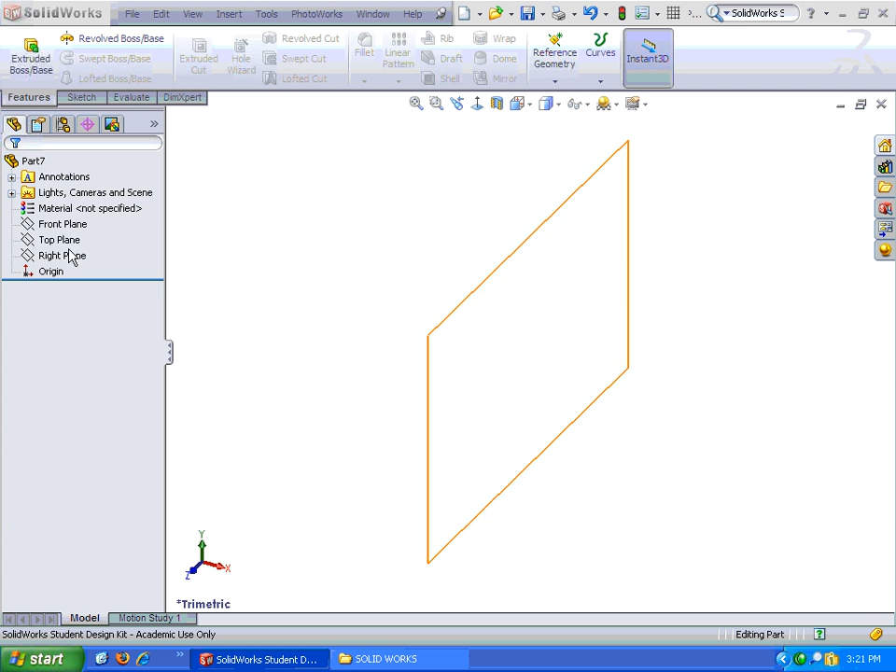Alright, lots of places we could start on this one. Let's go ahead and start on the top plane. So I'm going to click top plane, immediately hit the sketch button. It rotates it. I know my sketch is active because I can see the grid.

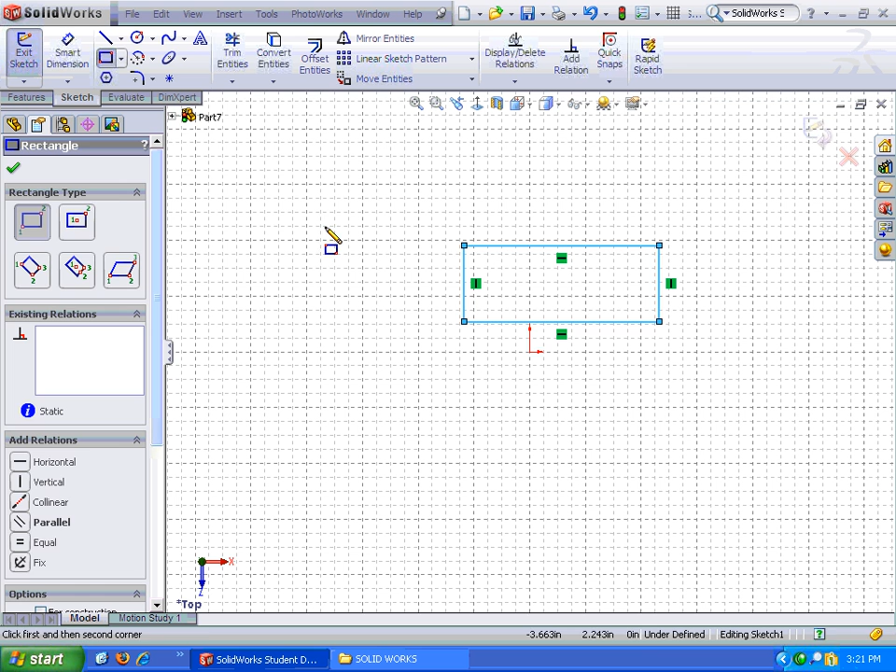So let's go ahead and start sketching. First thing I'm going to do is draw a rectangle, but I'm not going to tie it to the origin yet. Let's go ahead and put some dimensions on this rectangle. The height of that rectangle, or the depth of it, I guess, is 1.5. And the width across here is 3.25.

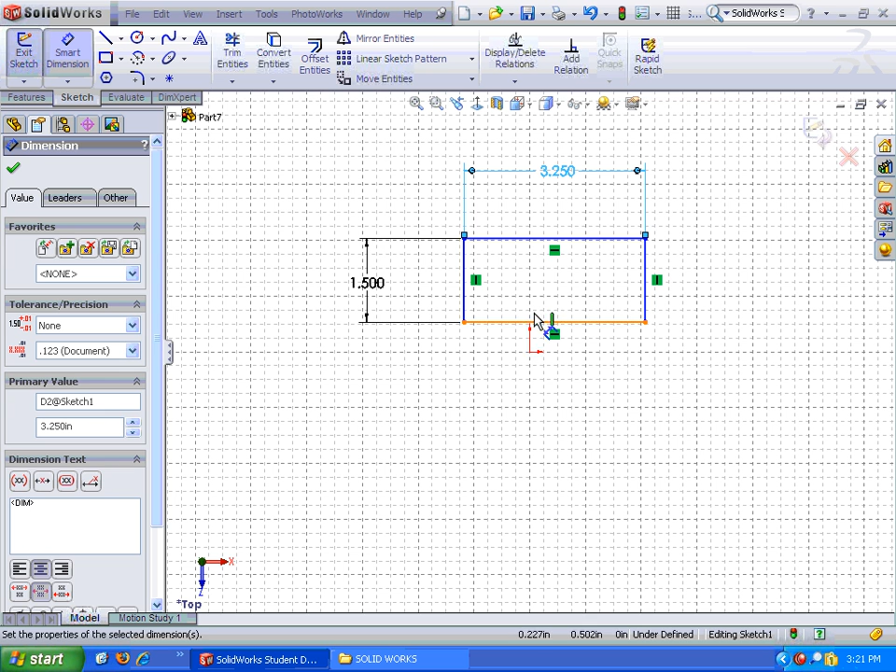Now we're going to tie it to this point. So I'm going to go up and go to Add Relation. I'm going to click on the line and the origin, and I'm going to go midpoint. Now it's tied in. Hit the check mark.

Now we can extrude it. So that's under Features, Extruded Boss Base. And I believe our height here is 0.375. Click the check mark.

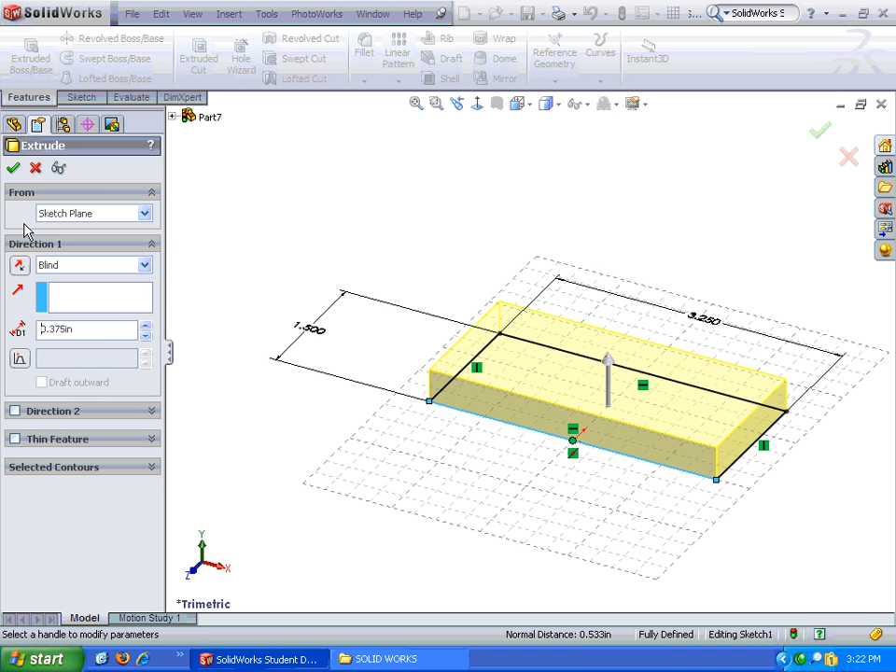Alright, now let's go ahead and sketch in our profile for the actual support portion of it. I'm going to click on this surface, turn it normal to, right click and put a sketch on it. And let's move that up just a hair.

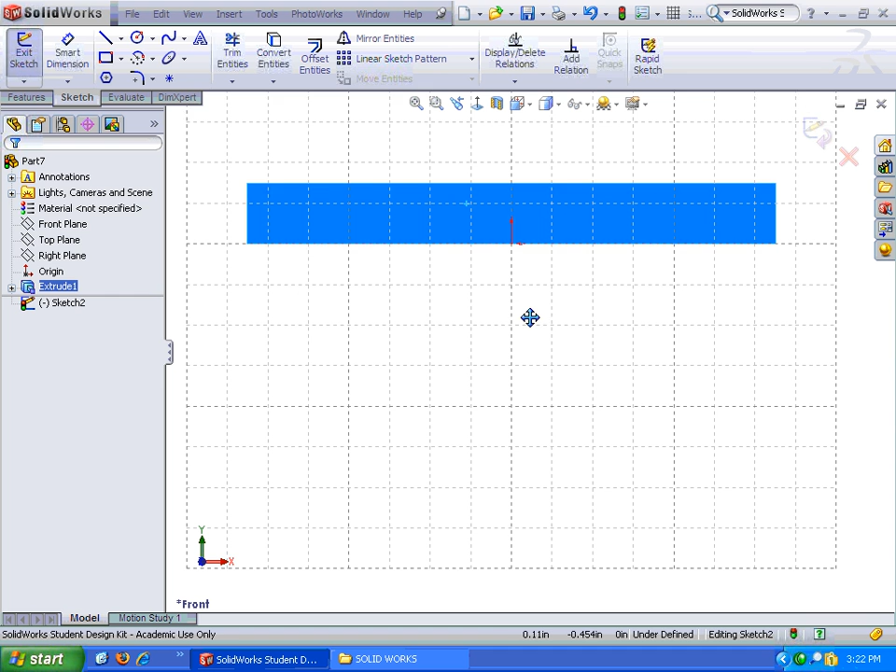Alright, first thing I'm going to do is draw a center line from the origin straight down. Okay, now let's put a circle on that center line. Whoops, it's drawing another center line. Circle, on the center line, doesn't matter where, make sure it's not clicked into the center or something.

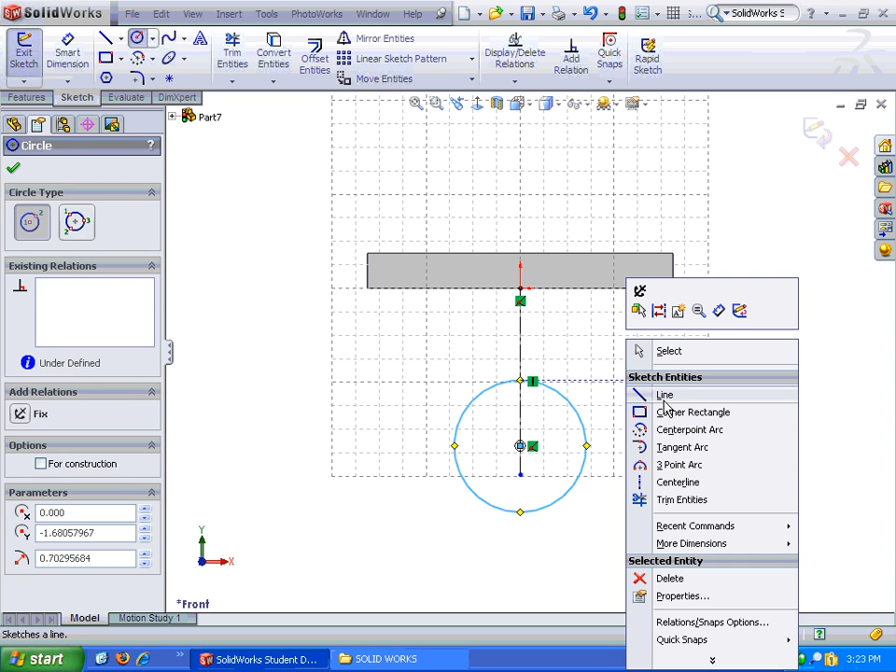Alright, right click and we can go to line. I'm going to go from the edge of the circle to the corner, and then I'm just going to follow this around so that my sketch is closed, and come back, and I want to make sure I get the tangent symbol in there.

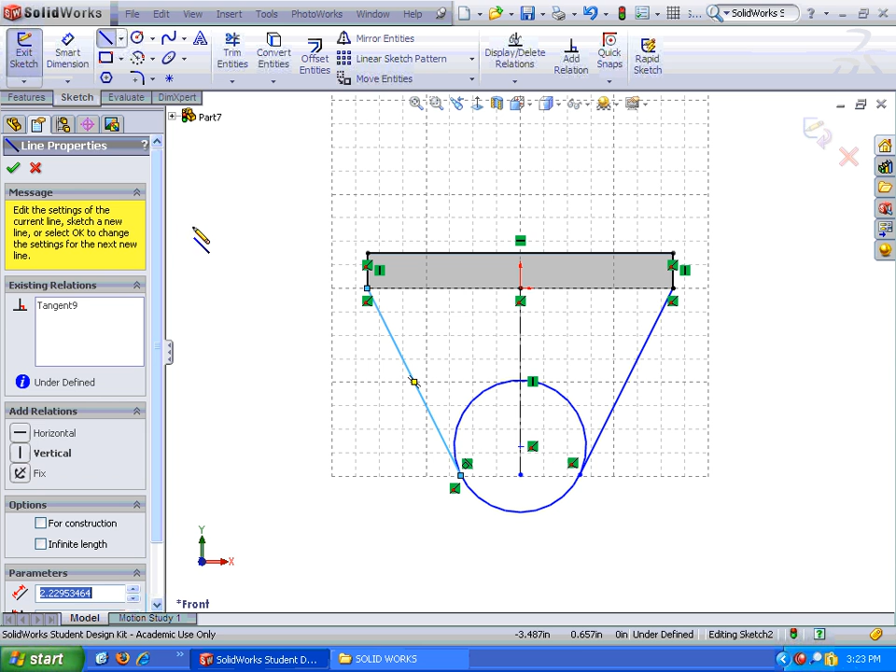Alright, now let's start putting some dimensions on. The distance from here to the bottom, or the center of my circle, excuse me, is 2. The diameter of my circle says it's a 0.75 radius, which would be a diameter of 1.5.

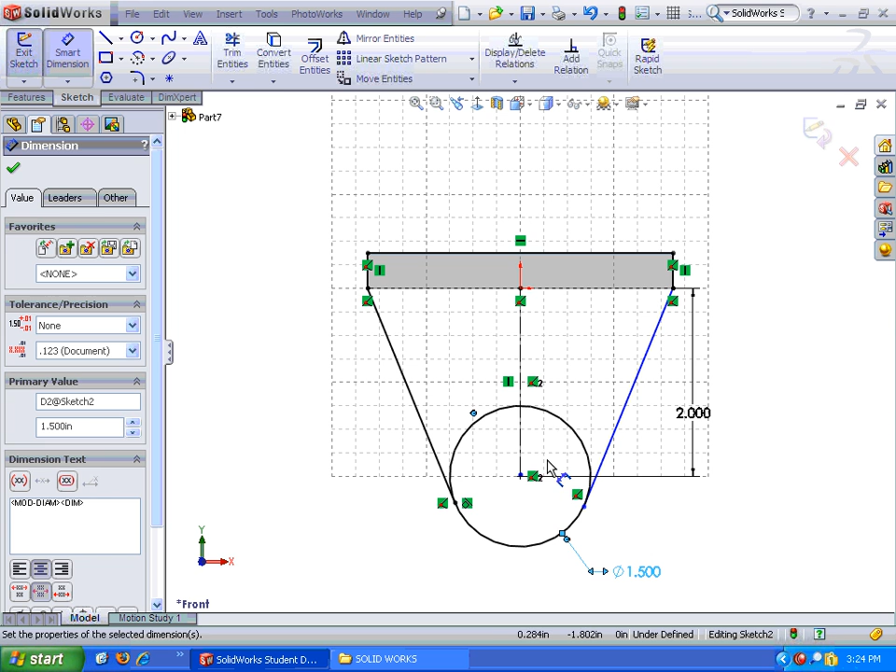Okay, and let's go ahead and trim the closest, and we'll trim this out. Now notice down here I have 2 little dots, which means I am not tangent.

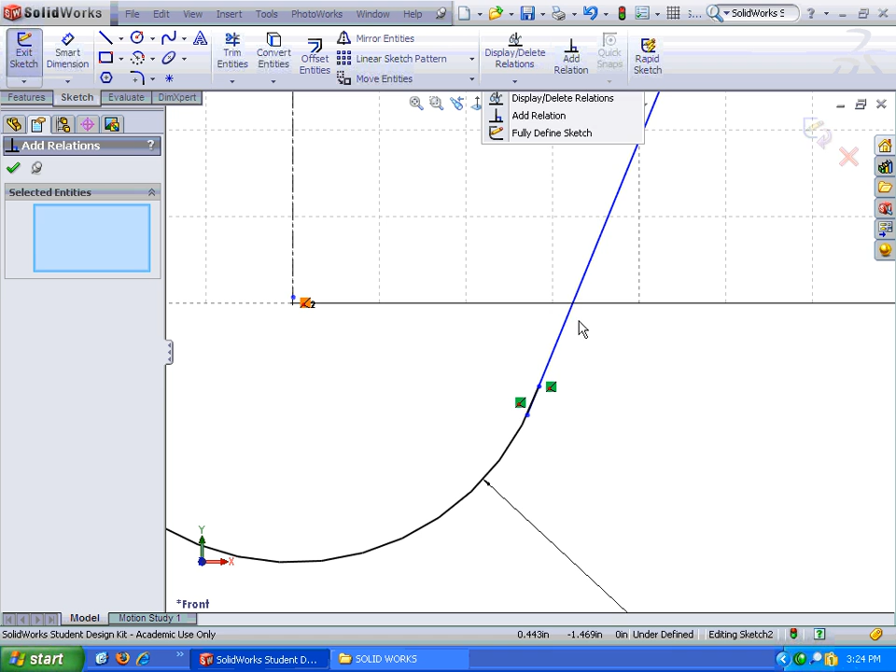So let's go ahead and make those tangent. I'm going to hit Escape to get out of Trim, go into Add Relation. I'm going to take that line and this arc and make them tangent. There we go.

That looks much better. Alright, now I'm ready to extrude. So I'm going to go to Features and Extrude.

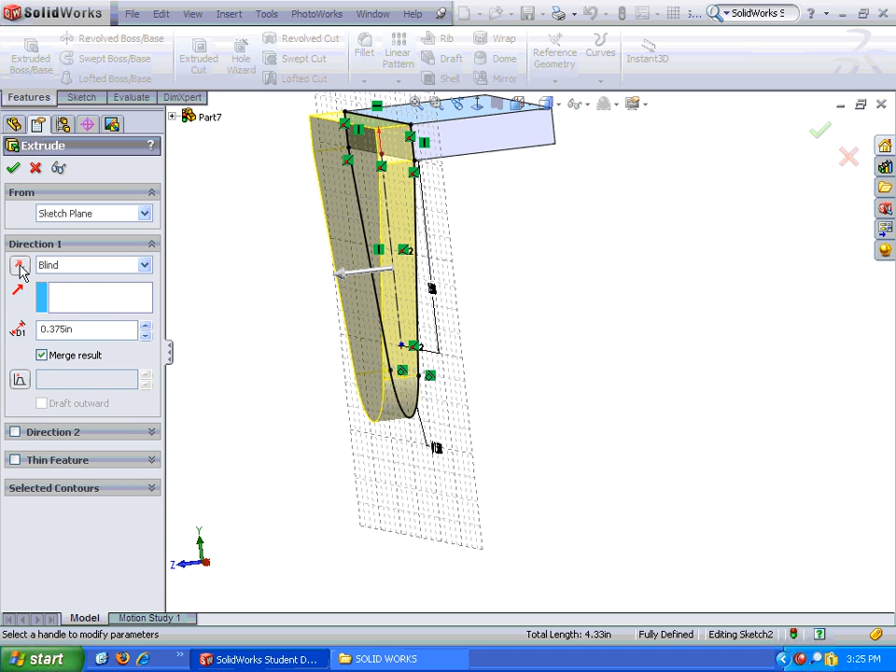I'm going to go ahead and rotate this. Remember that the total right here was 1.5, so if I add on to that, I'll be going the wrong direction. This little button right there is called reverse direction, so if I click on that, it will go the other direction. And the other direction, I want it to be 0.375, which is what it is set at. So I can hit the check mark.

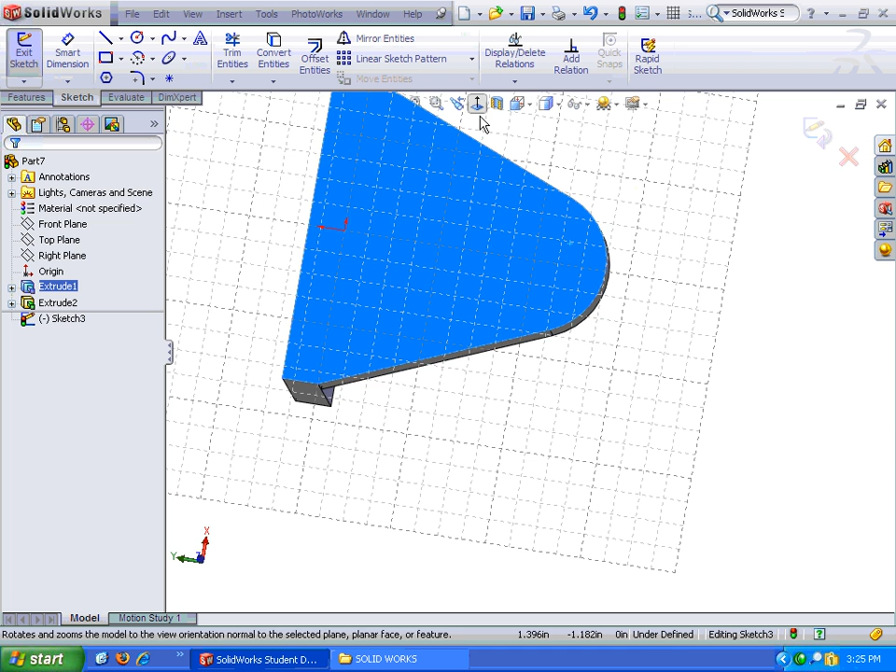Alright, let's put our circle in here that comes out a little bit. So I'm going to click on the surface, click on Sketch, click on normal to, click on circle. I'm going to hover over the arc, it'll give me the center point, and I'm just going to come out and tie that in to that arc. I don't even have to dimension it.

I can go to Features, Extruded Boss Base, rotate this so I can see it. It's good, it's extruding the correct dimension, and I believe that dimension is - I'm glad it tells me - let's go 0.125, and hit the check mark.

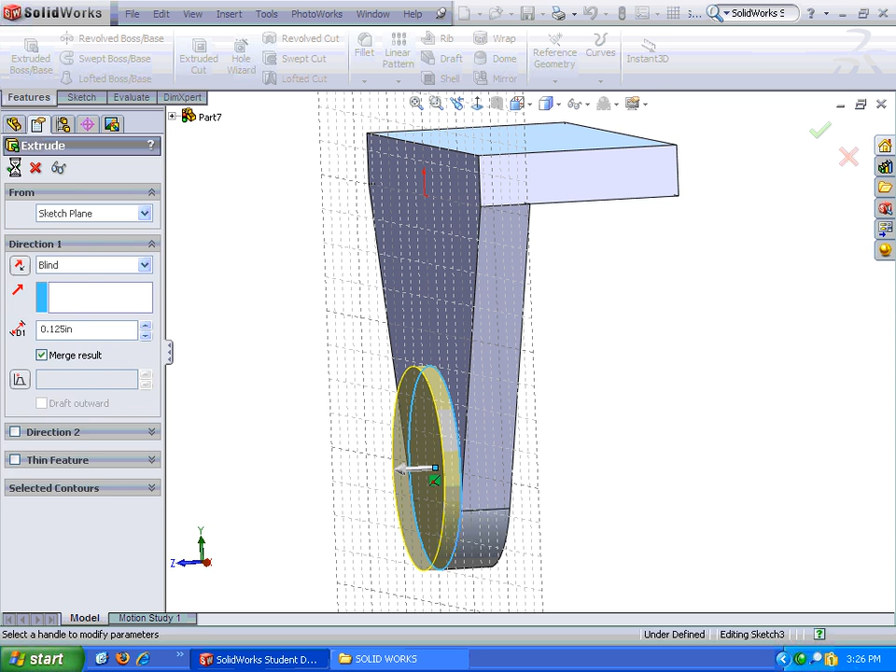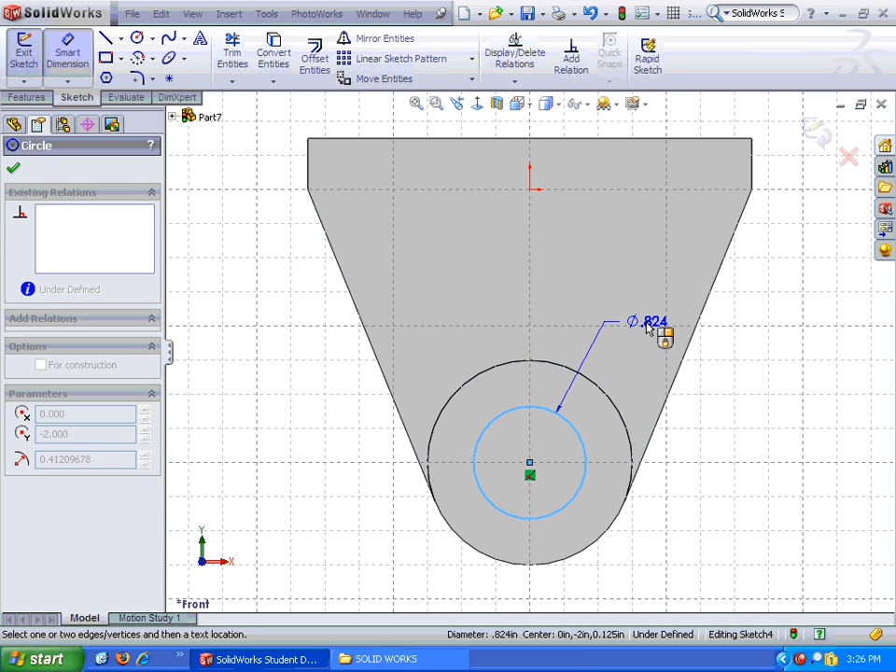Alright, next thing we're going to do is put the hole in this. I'm going to click the surface, sketch on the surface, normal to, circle, find the center, put the circle in, right click, smart dimension, click on the circle, and its diameter is 1.

So with that dimensioned, let's go to Features, and this time instead of extruding, we're going to cut. I'm going to click on Cut, rotate it, set it through all, and click the check mark.

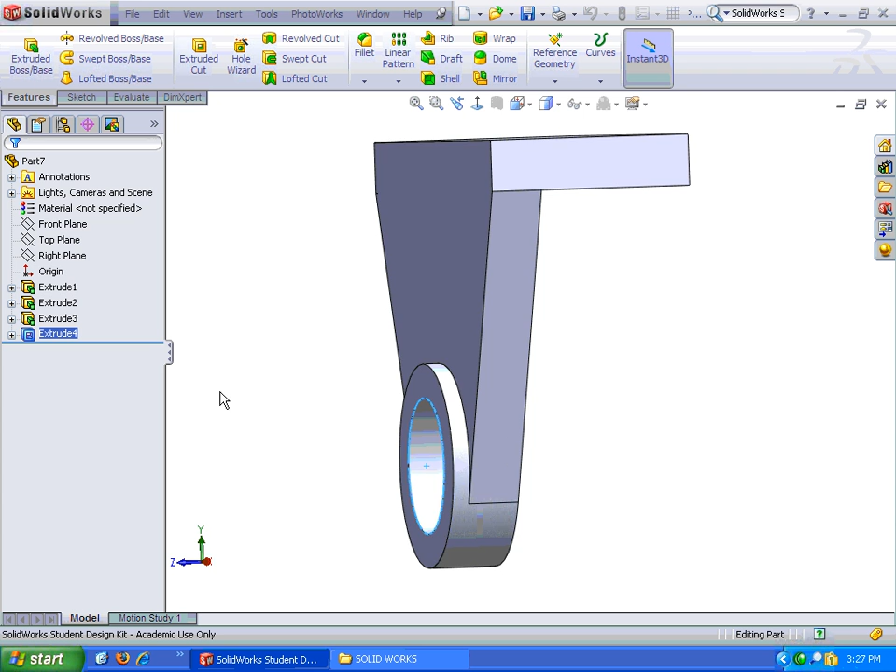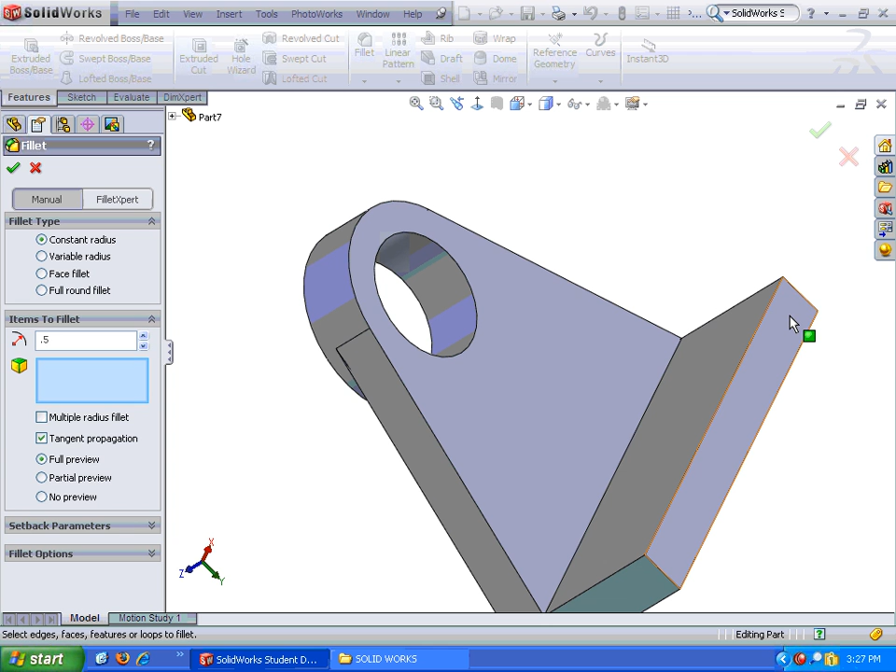So there's our circle. Let's put a couple of fillets on here. The fillet command, remember, is on the Features tab, fillet, and my fillet should be a radius of 0.5. Remember, I'm going to click on the edge, which is the little stick going up and down. Surface is the box. So I'm going to click edge and edge, 0.5, hit the check mark.

Alright, now I'm ready to put my counterbore holes in, and they go on this surface right here. So let's go ahead and click that surface. I'm not going to put a sketch on it though.

The Hole Wizard is located on the Features tab of the Command Manager. So I'm going to click on Hole Wizard. I'm not in a sketch, so I'll click on Hole Wizard.

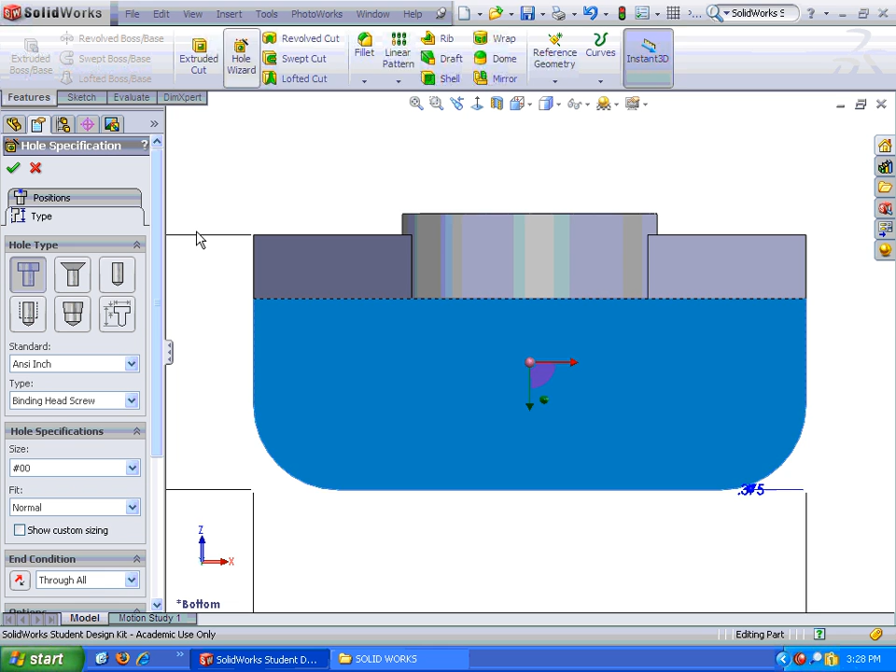A couple of different options on the Hole Wizard as it boots up. We're going to click on this one right here where I can select the type of hole I want, so it's like a customized hole. I'm going to use a counterbored hole. And I wish this would not disappear when I do that.

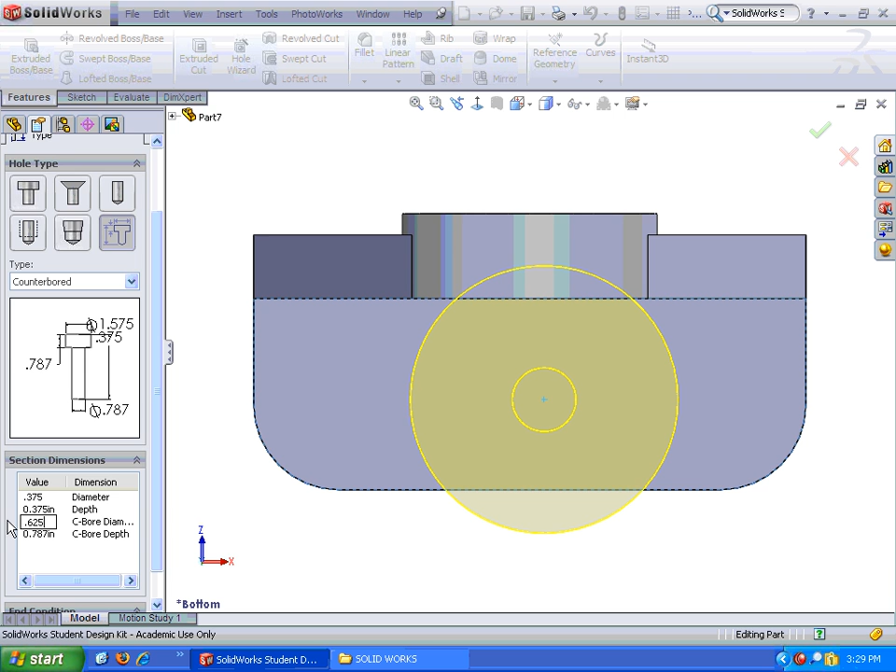But my inside diameter is... I have to get in there to edit it... 0.375. Don't worry about the depth because it's going to go through all. My counterbore, oh here it is up here now. My counterbore diameter is 0.625 and my counterbore depth is 0.125.

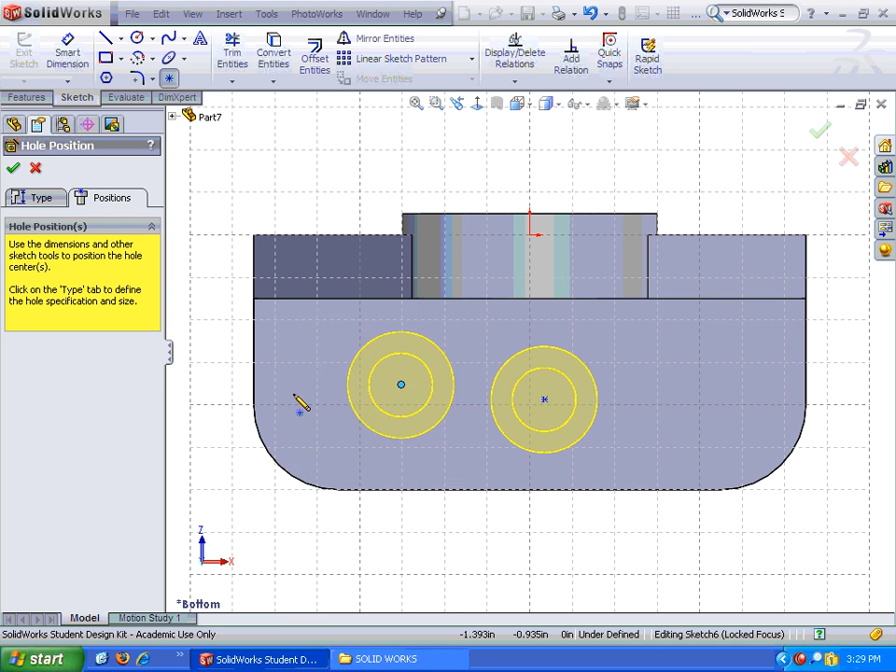So there's a preview of what it is. Now I'm going to go back up to the top and click on Positions. And I'm going to move that—I lied, I'm not going to move that. I'm going to click another one in. Then I'm going to find the arrow button wherever it is hiding. There it is. Right click and select.

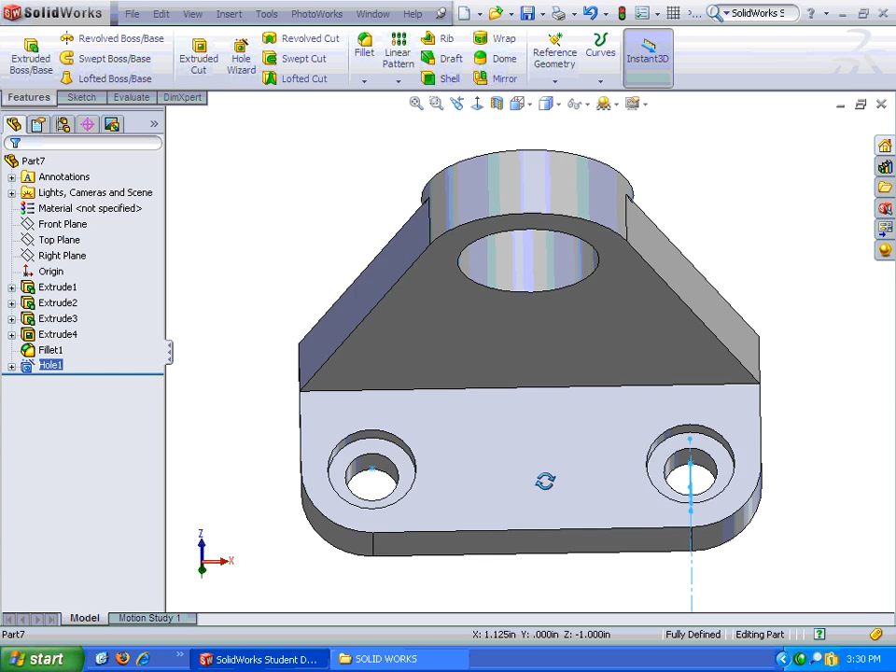Now I can move those, and I'm hovering again over the fillet to find the center point. Remember, it was a right click to get into that arrow. Once I have all those done, I can hit the check mark, hit the check mark again, and my counterbore holes are there. And we are ready to save this out.

Oh, I lied, we need to put the fillets on. Let's put the last fillets on. The fillet command is there on the Features tab. If you don't do these fillets in the right order, they have a tough time working. Let's go ahead and change the distance to 0.125, and I'm going to click this one first and hit the check mark.

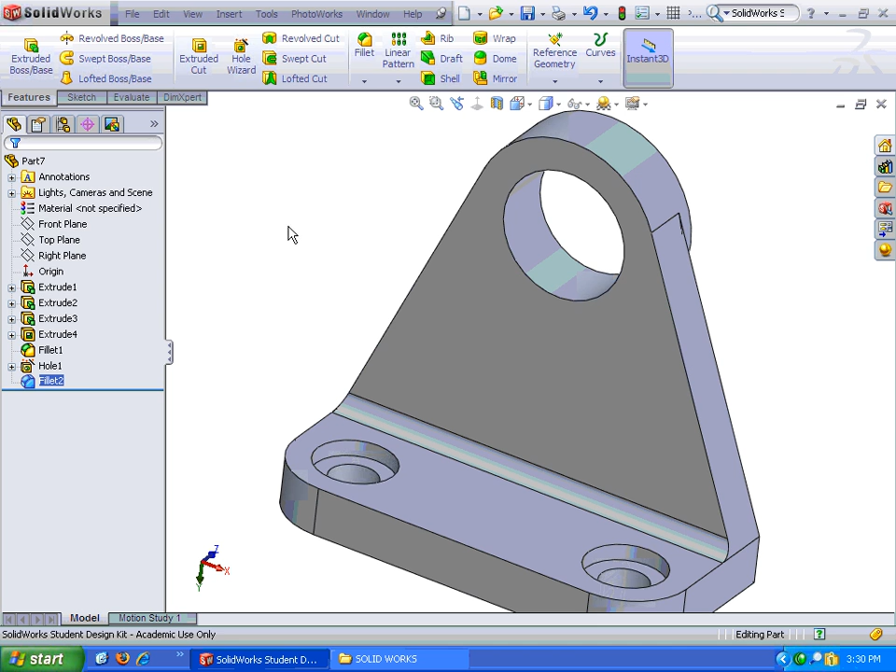I'm going to go to Fillet again. This time I'm going to click this edge and it should follow it all the way around, which it does. And I'm going to hit the check mark again. Now we are ready to save that out as the axle support.